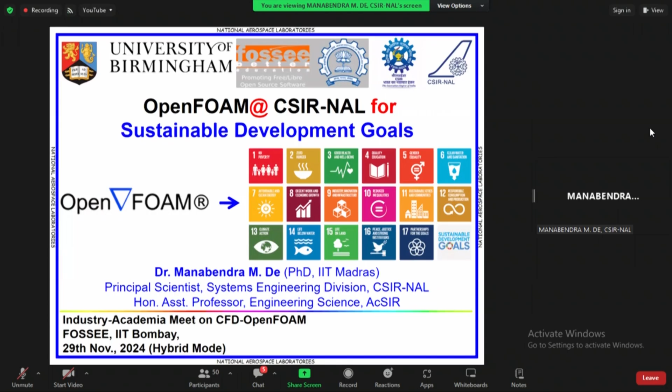So in line with that, the flow of discussion will be like this. Just for the formality, I will give a brief overview about CSIR and NAL, and then we will have a bird's eye view of how OpenFOAM was utilized or attempted to be used in NAL for Sustainable Development Goal number 7, number 11, and also multiple sustainable development goals which are touched upon by the aerial vehicle development program.

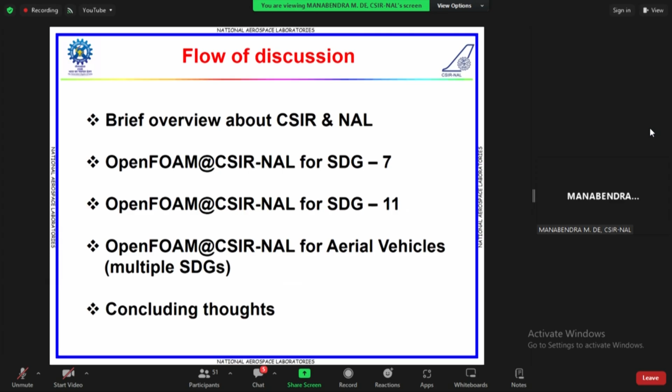And finally, I will conclude my discussion with the thoughts that I have. They are only my views, and just a disclaimer that it is not the overall view of NAL. So I take the responsibility for those statements that I will be making towards the end of the presentation.

So CSIR is a chain of research organizations. We have about 37 labs across India. And the nearest ones to IIT Bombay are NCL, National Chemical Laboratory, and URDIP, who are dealing with patents and patent analytics. In Bangalore, we have two labs, 4PI and National Aerospace Lab, where I work.

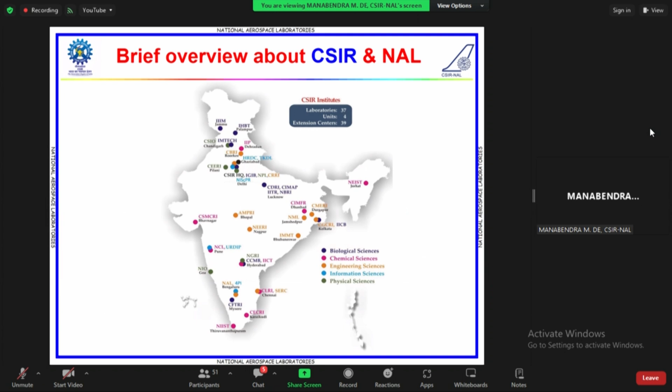And precisely, if you get into the interests of NAL, we have various focuses and various research disciplines. So it's basically like a bouquet of different technologies, competences, and research verticals that we work on, one of them being computational fluid dynamics. And our core focus is on civil aircraft and micro aerial vehicle developments.

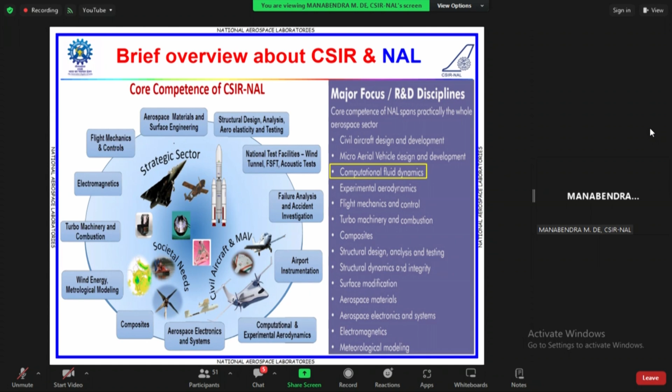Of course, we also support the space programs of the government of India as well as the defense programs of DRDO labs. At the same time, the technologies that we develop from all these programs, whether civil aircraft programs or strategic sector focused programs, the knowledge base that gets generated, we see to it that we translate it in some way for societal needs. So that's where areas like wind energy and meteorological modeling have also been researched at our institute.

So moving in that direction, the first application where we explored using OpenFOAM was for Sustainable Development Goal number 7, which talks about affordable and clean energy. And since its inception in 1959, CSIR-NAL has been working on developing technologies for wind turbines and different enabling technologies for harvesting wind energy, and also wind solar hybrid systems.

So when I joined NAL in 2006, I started working on that. And we were looking at different architectures of wind turbines, which would be installed either in an open field, in wind farms, or in urban areas. So when we talk about designing or conceptualizing wind turbines for urban areas, the first thing we need to understand is the flow pattern over a typical urban landscape.

And then understanding of that helps us to choose the configuration. So towards that direction, we did a work.

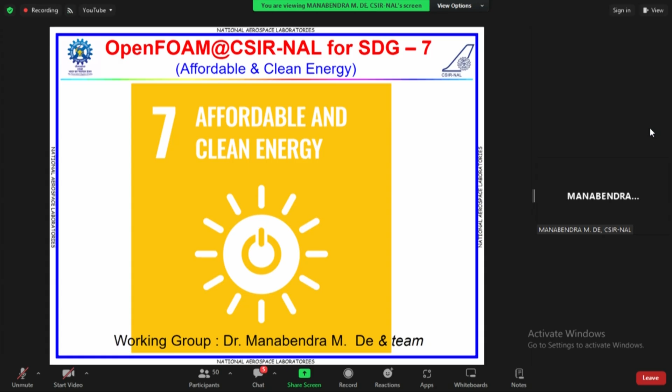And another thing which I would like to mention over here is all these things that I'm going to highlight today have been done in collaboration with academia, like the students at undergraduate level or postgraduate level, when they came to NAL for their internship or their final year project works. Along with them, we explored this unified world of OpenFOAM and tried to see for these kind of applications how do we utilize the merits and all the capabilities of OpenFOAM.

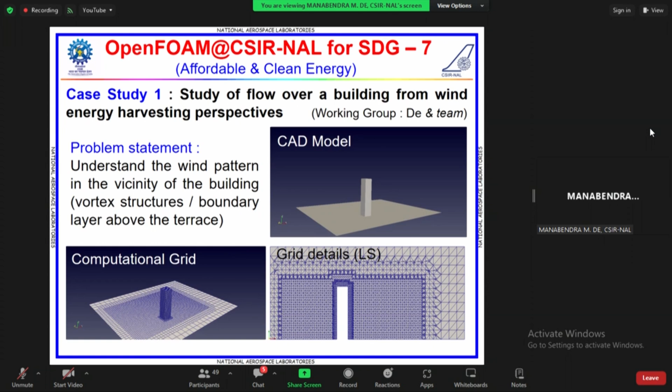So as I was telling, we first tried to understand the wind patterns in the vicinity of the building. So you can see a very idealistic CAD model of a landscape and its computational domain and the grid details which are generated by the snappyHexMesh capability of OpenFOAM.

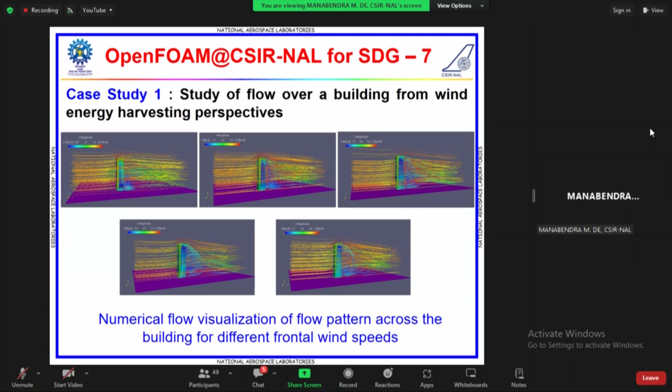And then we simulated the flow past this building to understand what sort of flow patterns would get generated and what sort of boundary layers get generated in the vicinity around the building and over the top of the terrace. And then we tried to understand what is the variation of the free stream velocity vertically above, for example, the terrace of the building, where it is the ideal place for putting a wind turbine.

Now, if you look at these results, there can be two thoughts. One is that we try to have a pole which protrudes out of the boundary layer over the terrace of the building, and then we put a conventional wind turbine. But in that case, there will be a lot of structural implication on the terrace flooring as well as the building structure altogether.

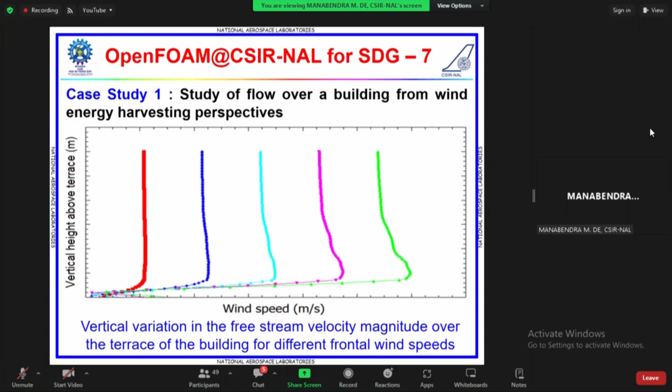So this study posed another problem, or we would say another query to us, that whether we can have an innovative shape which can work within this boundary layer where there's a lot of recirculation happening, a lot of turbulence is there in this layer, but at the same time we avoid some huge support structure like a tall pole over the terrace of the building. So that query drove us to looking into nature, which brings us to the next case study, where we tried to see whether we can take inspiration from nature and borrow some magnificent shapes which nature has evolved over not just decades but centuries or even maybe ages.

As we know, Darwin's theory of evolution says survival of the fittest. It is not just that the animals or the birds or insects have revolutionized their characteristics to survive, but also a passive looking thing like a seed pod of a tree has also evolved throughout this period. And only those shapes that have survived are the ones which we see today.

So in that context, we thought of looking to the seed pods of two different species, Bauhinia variegata and Mimosa, and see which shape will give us a standstill aerodynamic torque which will be greater than the cogging torque of a typical generator of a small wind turbine.

Now, just for the background, if we look at the small wind turbines, they use permanent magnet generators which are notoriously known for the high starting or cogging torque, which prevents them to start quickly or in low wind speeds. So the question here was, can we borrow a shape from nature which will help to start in a very low wind speed, as low as maybe 1 or 2 meters per second, which is beyond the capability of the conventional rotors, the horizontal axis wind turbines, or the ones which are using the lift type mechanism for generating the torque.

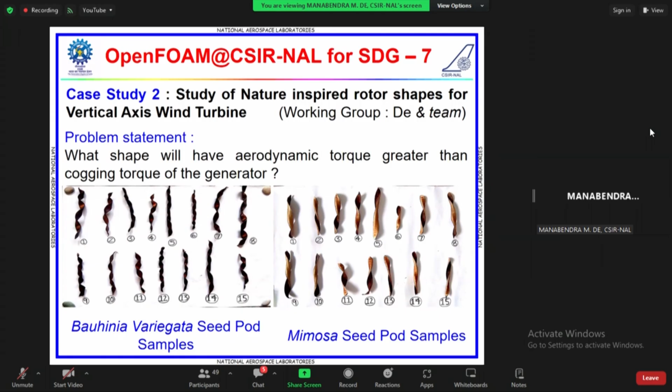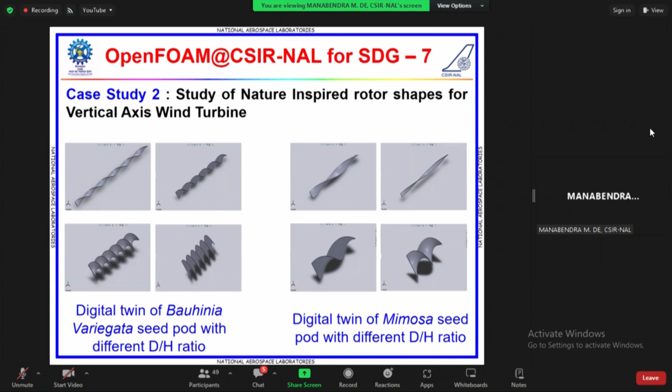So in that context, what we did was we collected the specimens of the seed pod, and then we generated a series of digital twins by varying two geometric parameters. Over here, what you see is the diameter to height ratio of these seed pods. And then the conventional approach of meshing the surfaces and then creating the grid for the flow simulation. And it was all done in OpenFOAM.

Of course, at that period of time, we were using the body fitted grid. So, we had to approximate the shapes. But when I was doing my PhD work at IIT Madras, I was exploring the possibility of using the immersed boundary method, which is one of the methods used to handle very complicated geometries, and also the ones where you have dynamic meshing kind of a thing, or maybe moving boundaries, to be more specific.

And luckily, while I was trying to explore that, the foam-extend had initiated the work, and I believe today it will be at a very advanced level. So probably one question that I would like to put to the FOSSEE OpenFOAM forum is to explore the possibilities of seeing the implementation of the immersed boundary method, and exploiting it for analyzing a rotating blade, the one which we are trying to see over here.

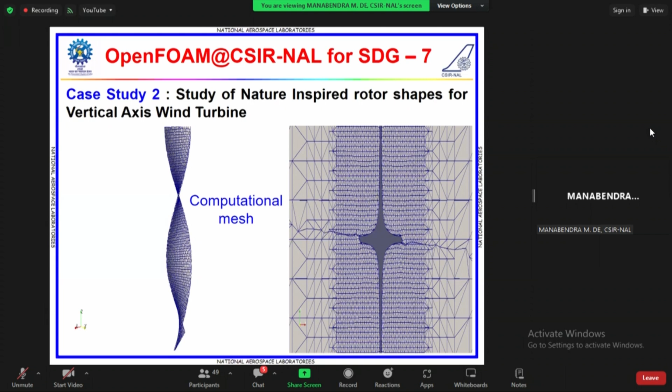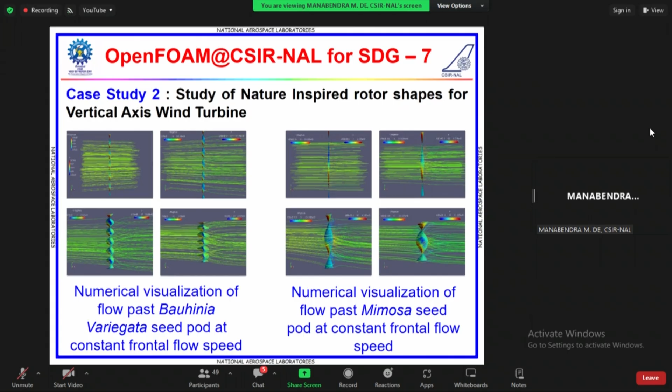So at that point of time, of course, we were handcuffed with only the basic static mesh. So we tried to understand how the static force or the static torque varies for different geometric parameters. So that is where you can see over here that we studied the natural shapes for both the seed pods, and then based on the findings of the starting torque, we then moved on with one of them, the mimosa based rotor, and then again varied the pitch to height, or the number of turns.

We varied the number of turns of the rotor, and then again repeated the same understanding to see how the starting torque of the rotor will be generated vis-a-vis the cogging torque of the typical 1 kilowatt permanent magnet generator.

So at present, what we are doing is, based on these studies, we are trying to print a 3D model with the help of 4 PhD students under their societal module under the ACSIR framework, and see whether whatever understandings we had got from OpenFOAM are really going to have the same effect, or we are going to have any surprises.

But at the same time, as I already mentioned, probably we can use the immersed boundary method sort of formulations in OpenFOAM to see when the seed pod rotates, what sort of forces are generated, and what sort of characteristics these rotors would exhibit. So this is one example of OpenFOAM.

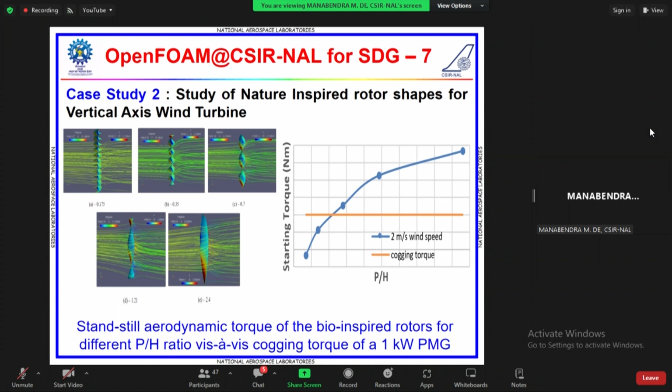The second one, which I am going to highlight, is from the working group of Dr. T.N. Venkatesh and team, who are from the computational and theoretical fluid dynamics division. So, as we know, urbanization is happening everywhere across the globe, and India has not remained untouched from it. So, when we talk about urbanization, one of the critical things that needs to be understood is the urban heat island. Because of the concrete jungle that grows during the urbanization cycle, the problem of urban heat islanding also grows very much.

So this group at NAL tried to understand how these landscapes, or the anthropogenic landscapes, will affect the wind pattern, and what sort of heat islanding effects will get generated in the vicinity of the cluster of buildings.

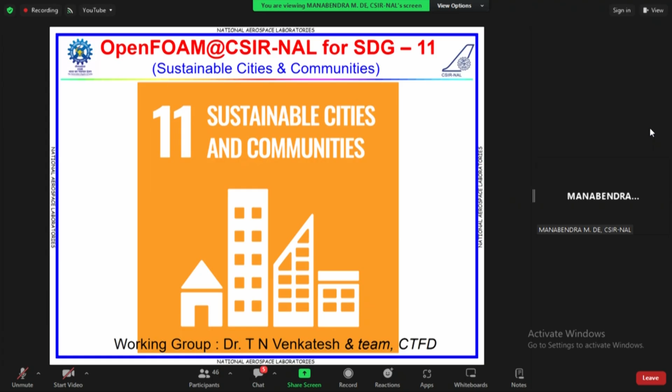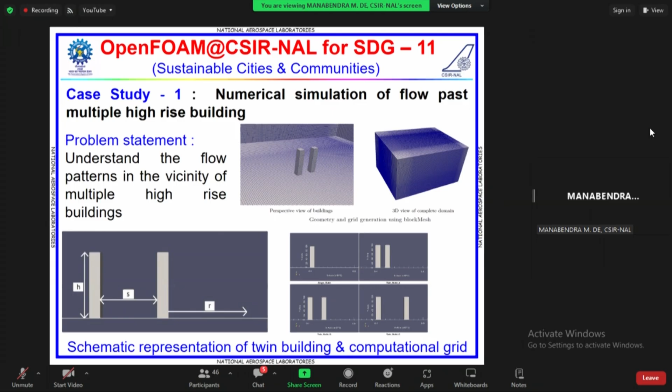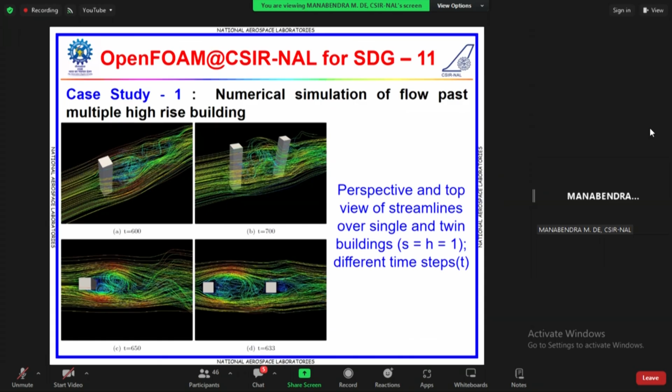So they went in a very systematic way, wherein they first simulated the flow past a very idealized domain of two high-rise buildings, and tried to understand the flow patterns that are occurring, and then they varied the distances between the buildings, and tried to see what changes were happening in various features, with the velocity contours or the streamlines of the flow in the vicinity of the building.

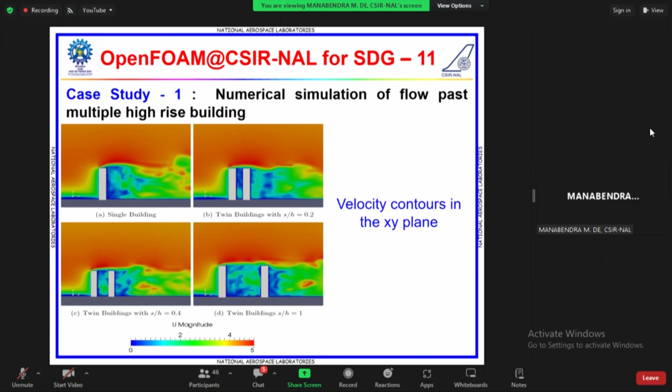Having gained confidence on this using OpenFOAM, the group moved forward towards doing simulation on a real world kind of scenario. What you see over here is they have attempted to do the same study for the Petronas Tower, which is in Kuala Lumpur, Malaysia. It is about an 88-storied building, around 452 meters, approximately 1483 feet. So the same studies which were done for idealized conditions were now done for a building which exists in the real world.

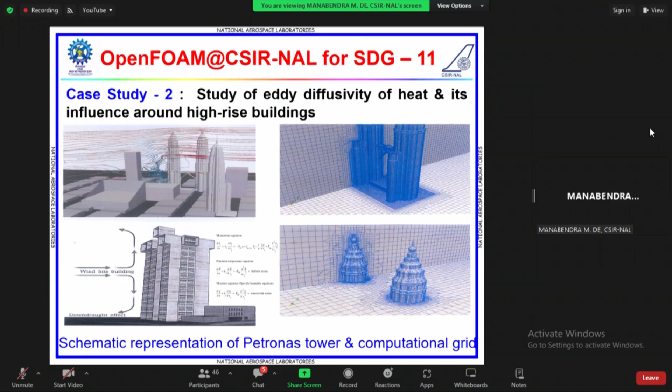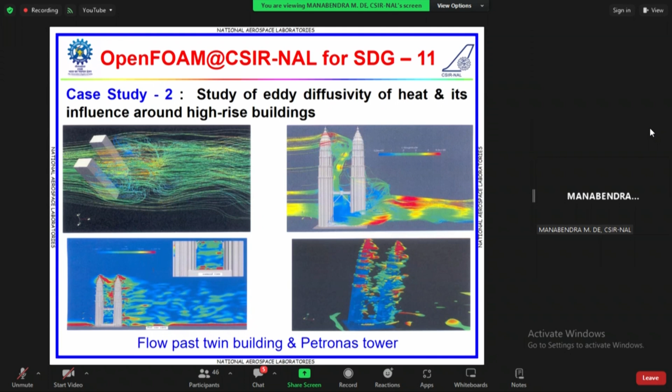So again, similar studies were done over here, but apart from the wind patterns, this time they also focused on the thermal effects of urban building clustering, and tried to gain more insight into how the wind patterns were getting changed because of the thermal effects. They did this by studying the eddy diffusivity of heat coefficient kh values, and the basic understanding here is, if you have a higher kh value, there is a lot of thermal exchange happening.

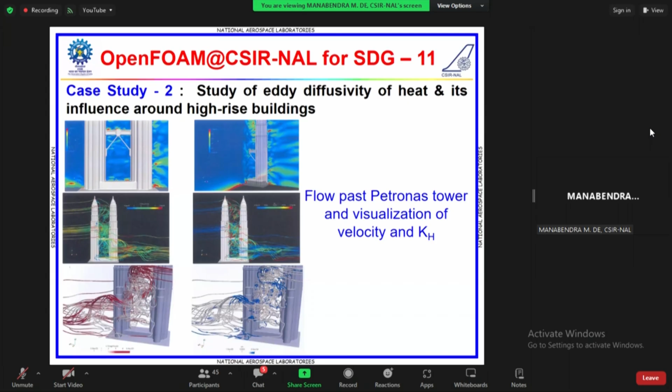So this can help us to detect which zones within the cluster of buildings are having a lot of thermal gradients, and then what can be done to address the discomfort that are caused due to that.

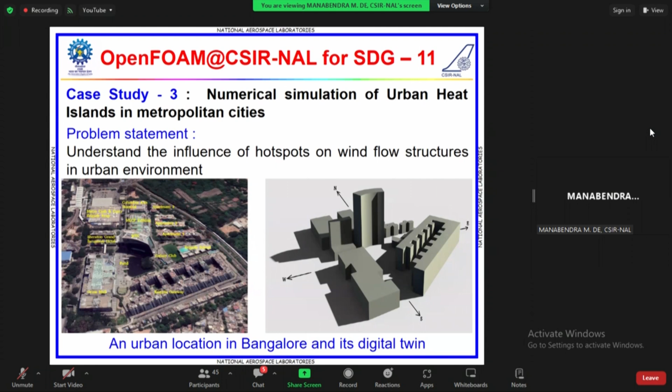So having gained experience on a hypothetical but a real world case, this team went forward of taking the case of the World Trade Center, which is there in Bangalore, an urban location in Bangalore, and they also tried to understand what is happening in terms of the urban heat islanding using OpenFOAM.

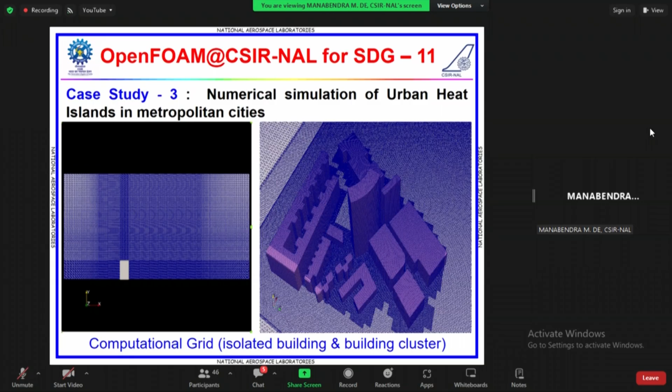So again, you see over here the computational domain and the grid across the landscape that was chosen. And two glimpses of the numerical simulation where you can see the stream tubes and the contour plots of the velocity magnitudes over here. The entire simulation as well as the gridding was done using the capabilities of OpenFOAM. That is the best part of it.

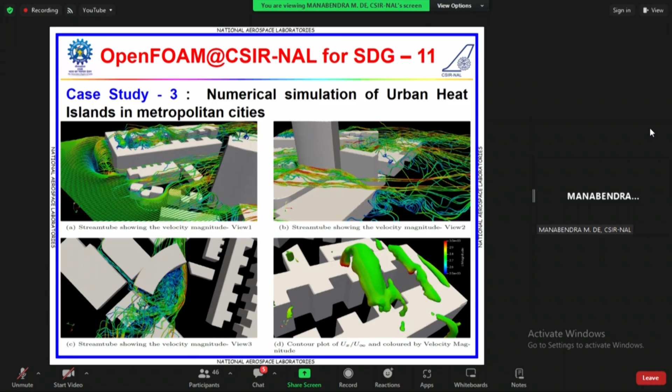This work was done in conjunction with the student from Madras Institute of Technology, Anna University, and Dr. T.N. Venkatesh's team. And probably we will see if the student who worked on this problem can be also included in the FOSSEE's forum in the near future.

And another innovative part of this simulation was the WRF model, the weather research and forecasting model output was used as the input for the CFD simulation over here. So there was a coupling done between the mesoscale modeling and the microscale modeling in this particular study. So that was another thing which tells us the versatility of OpenFOAM to absorb an input from a computational model which could be of a different scale altogether.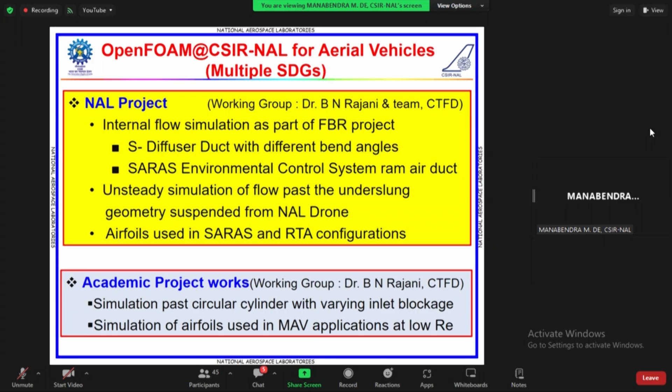And in line with that, the academic projects that were taken were using OpenFOAM for simulating very elementary flow physics like simulation past a circular cylinder or simulation of the airfoils used in MAV applications. So these are some of the glimpses where OpenFOAM, along with another flow solver SU2, which is from Stanford University, were used. And apart from that, the in-house code 3D-PURLES, which is a hybrid RANS LES code.

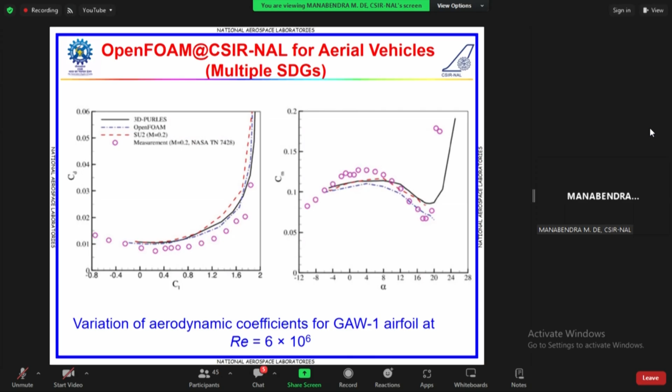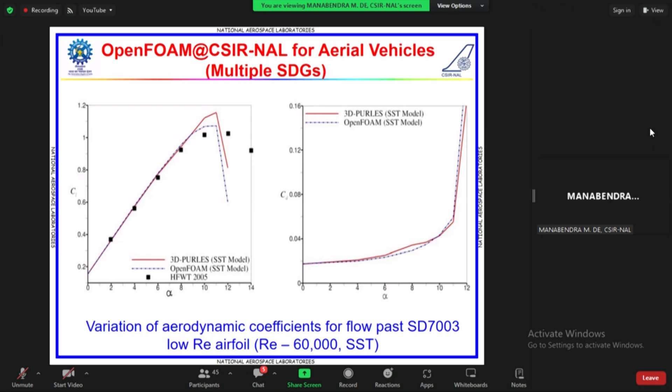They were also used to understand the variation in the aerodynamic coefficient across different airfoils for different angles of attack for different turbulence models. And you can see over here, we have very good, similar trends between the in-house codes as well as OpenFOAM, and their comparison vis-a-vis the experimental observations that are available.

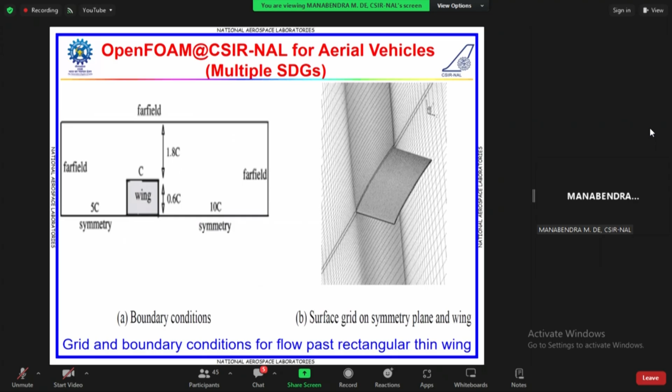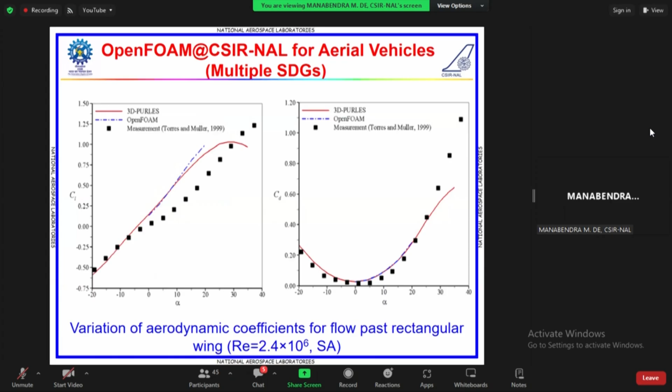Of course, here, moving from 2D simulation, OpenFOAM was also used for studying the flow past rectangular thin wings, which are very typical for UAMs or UAVs, and the overall appreciation of how the in-house code, OpenFOAM and the measurements do vis-a-vis each other. These are some of the glimpses.

And moving further with a practical example of flow past the fuselage. So this was another study that was done using OpenFOAM as well as the in-house flow solver. And unlike the previous two groups, that is my group as well as Dr. TNV's group, here the grid generation was through either ICEM CFD or Pointwise grid gen, which are commercial grid generators.

So again, here the versatility of OpenFOAM was established: it is able to not just absorb the input from a third party tool, but is also able to absorb the grid which is generated from a third party. Like, if we don't use the snappyHexMesh capability of OpenFOAM, we can make the grid in a third party mesh generator and then use it in OpenFOAM.

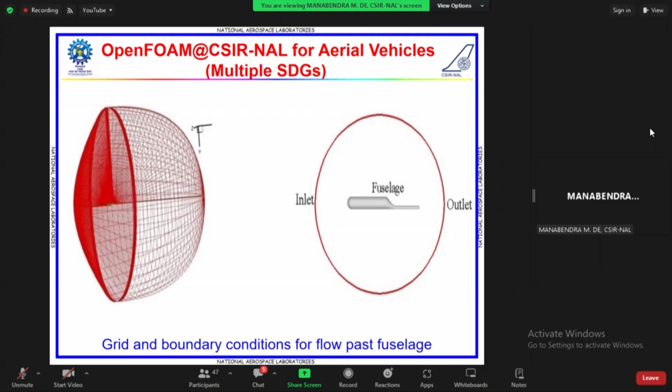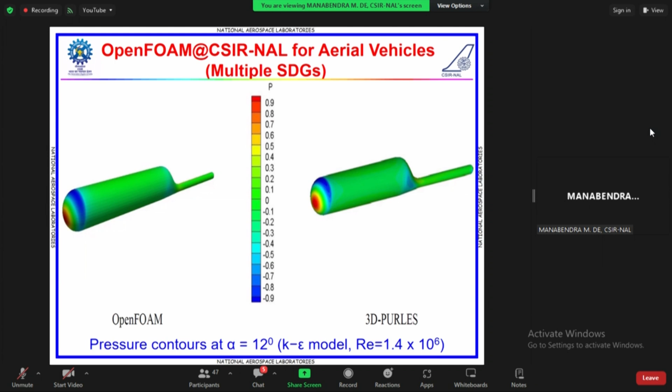So with this, I would just like to share my concluding thoughts. We have a dire need to use the OpenFOAM framework for both academic and industrial research, and a platform for exchanging notes and discussing the issues that are being faced by the OpenFOAM community is imperative. Of course, a pool of HR which has expertise in handling OpenFOAM will be really a boon to the Indian industry as well as the research fraternity.

And the NABLA sign, which is an integrated part of OpenFOAM itself, gives an indication that the need of the hour is to realize a research triangle wherein academia, industry, and research organizations come together and we try to see how the magnificence of OpenFOAM can be extended to the various challenges which academia as well as industry is facing.